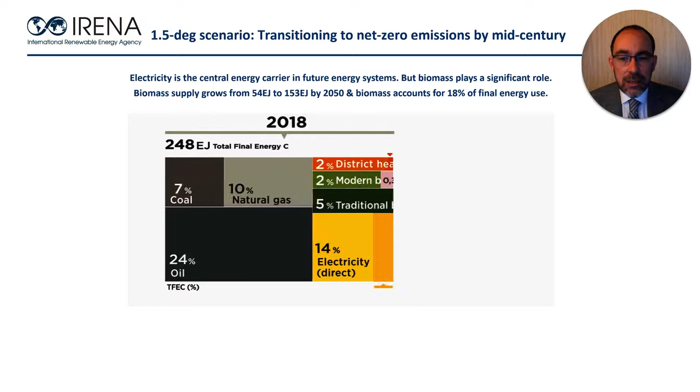The chart you're seeing now shows how the use of key energy carriers evolves over time in IRENA's 1.5 degree scenario. Renewable energy supply, electrification, and energy efficiency are the key components of that transition. Our analysis suggests that we have most of the technologies needed for that transition, and crucially, that energy transition is affordable.

As I said earlier, the pace and scale, however, is daunting. To give you a sense of that, by 2050, power generation triples compared to today's level, and renewable supply reaches 90% of total electricity, up from 25% in 2018. That's going to require 10 times more renewable power generation capacity.

By 2050, around 58% of final energy consumption is electrified, either directly or through green hydrogen and its derivatives. Hydrogen demand grows from 120 megatons to 613 megatons in 2050. That requires something like 160 gigawatts of electrolyzers to be added every year from now to 2050. Installed capacity of electrolyzers was just 0.3 gigawatts in 2020.

Biomass equally needs to substantially grow. In the 1.5 degree scenario, it grows sustainably from 54 exajoules to 153 exajoules in 2050, with biomass and its derivatives accounting for 18% of final energy use by 2050. Now, that 153 exajoules is at the high end of our and others' assessments of sustainable potential. One of the big challenges in the energy transition, therefore, will be scaling up production sustainably, i.e. without causing social, environmental, or economic harms.

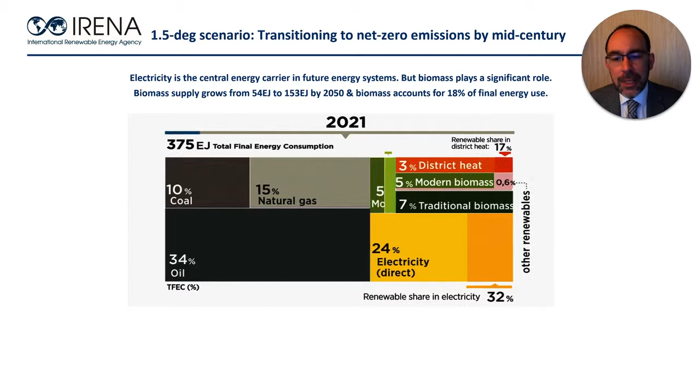Aviation is widely regarded as one of the trickiest sectors to decarbonise. Globally, aviation produced 915 million tonnes of CO2 in 2019, about 2% of total global emissions. And it was a sector expected to grow. Prior to COVID-induced reductions, annual jet fuel consumption was about 360 billion litres a year, and it was forecast to more than double by 2050.

As other sectors decarbonise fast, aviation will account for a growing share of remaining emissions. And beyond energy use, aviation is also responsible for non-CO2 related impacts on the climate.

The industry is committed to a 50% reduction in CO2 emissions by 2050. But in the context of those global net zero targets, a 50% reduction is not ambitious enough. IRENA's 1.5 degree scenario suggests aviation emissions will need to fall by about 90% by 2050.

Now, the optimum mix of solutions to decarbonise aviation is still not clear at this point in time. However, the key building blocks are pretty clear. As with most sectors, the starting point needs to be to manage demand, both in terms of demand for air travel and the energy demand of that travel, i.e. by improving efficiency of aircraft and of operations.

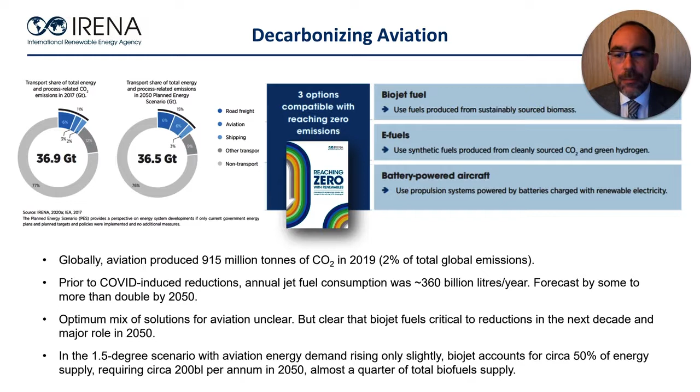So let's talk about Biojet. Biojet looks to be the only cost-effective option for partial emission reductions in aviation in the next decade, and it looks likely to play a major role in decarbonisation through to 2050.

Our 1.5 degree scenario assumes that energy demand can be held down so it only increases slightly by 2050. And within that scenario, Biojet fuels provide roughly 50% of final energy demand. Delivering that level of energy demand would require about 200 billion litres of Biojet fuels per annum in 2050.

Next month, as part of a series of deep dive reports on key components of the pathway to zero, we will be publishing the Reaching Zero with Renewables briefing paper on Biojet fuels. That explores in depth the current status and future potential of Biojet and the actions needed to realise that potential. Let me give you a few insights from that work, and then I think other presenters will dive a little deeper.

Current Biojet production is about 140 million litres per year. And although production has increased significantly, up from 7 million litres in the previous year, commercial volumes remain relatively small, less than 0.04% of current aviation fuel use.

Production is currently limited to 2 plants that routinely supply about 9 airports, and whilst demand is ticking upwards, Biojet use is still relatively low. It's typically blended in low ratios with fossil jet fuel, and cumulatively to date, an impressive sounding 315,000 flights have used blended Biojet fuels. But that's less than 1% of flights in 2019.

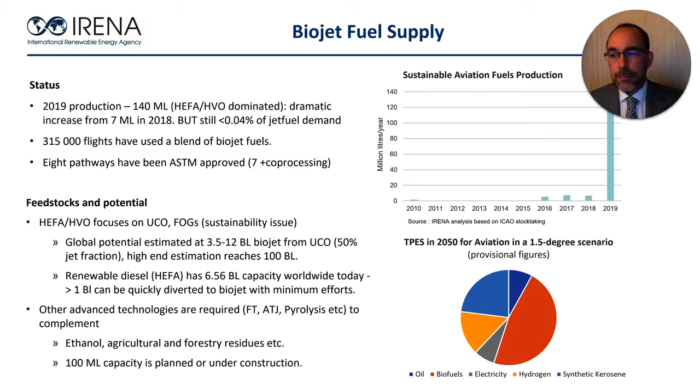Finally, a quick word about costs. Fuels produced by the HEFA HVO route cost around 3 to 6 times more than conventional jet fuel, and that's mainly due to higher feedstock costs. High capital costs will be an obstacle for some of the other technologies that I mentioned, such as gasification. Our report highlights various strategies focused on that, but the cost disparity will remain for many years to come and will require policy interventions, but is also a powerful driver for innovation.

So in conclusion, as with other parts of the energy system, global goals of deep decarbonisation by 2050 require concerted action this decade. Aviation is one of the sectors where least progress has been made. Biojet has a crucial role to play in addressing that and has significant potential. But we need systemic innovation, including technology innovation in feedstocks and conversion technologies, but going beyond that, where technology innovation goes hand in hand with innovation in supply chains, business models, and the financial and policy incentives. Together, that systemic innovation can greatly increase the future prospects of biojet fuels.

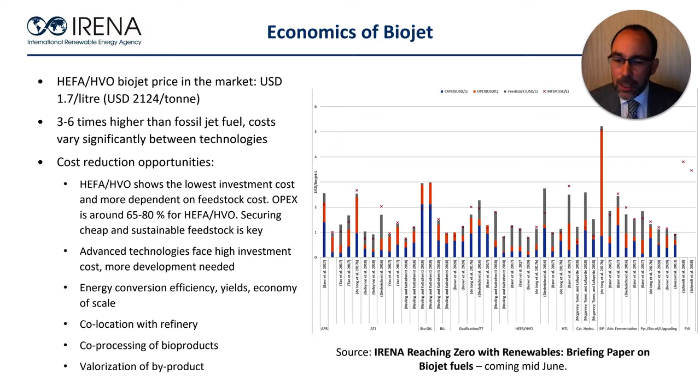Department of Biotechnology, known as DBT, has been promoting innovations and research, development and demonstration through multiple schemes at both national and international level. It is my pleasure to present India's perspective on sustainable aviation fuel for the side event of the 6th Mission Innovation Ministerial. Thanks to Mission Innovation Secretariat and the Chilean host for giving this opportunity.

India has been engaged actively in MI activities and was co-leading sustainable biofuel innovation challenges along with countries Brazil, Canada, and China. A few collaborative projects supported by India in advanced biofuel areas, including jet fuel R&D. Building on success of R&D base during phase 1, co-leads have agreed to work together in focused areas of sustainable aviation fuel.

Liquid biofuels is one of the prime candidates for decarbonization of hard-to-abate transport sector, and thus can result in substantial reduction in GHG emissions. The National Policy on Biofuels 2018 encourages blending of biofuels in conventional fossil fuels. Aviation fuel consumption in India accounts for about 8% of Asia's aviation fuel demand, with average annual growth in the range of 7 to 9%. Current production of aviation fuel is 180,000 barrels per day, though the COVID pandemic has adversely affected consumption of aviation fuel.

Meeting ASTM specification is extremely important for SAF. Once certified, SAF can be used for blending purposes in aircraft using an airport delivery network.

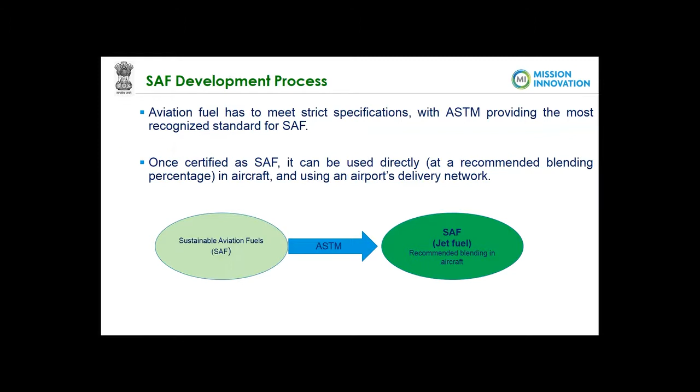Aviation presently contributes 3% of global GHG emissions. A significant increase in the production and consumption of sustainable aviation fuel is required in order to achieve the GHG emission reduction targets proposed by ICAO.

Presently, less than 0.1% of jet fuel is from bio-origin, and 99% of this is hydroprocessed esters and fatty acids. Feedstock plays a very important role. GHG reduction potential differs depending on the raw material used with respect to conventional jet fuel.

Concerted effort is required along the value chain, hence it is important that all sectors and concerned ministries work together. DBT, Ministry of Science and Technology, promotes innovation and RD&D by funding projects, while Ministry of Petroleum and Natural Gas regularly works on policy and implementation aspects. CSIR labs, DBT bioenergy centers, NGOs, institutions like IITs, and universities all implement R&D projects.

Oil marketing companies produce large SAF quantities from a viable refinery-based technology. The Ministry of Civil Aviation is interested in meeting the forthcoming ICAO regulations for low GHG emissions from the aviation sector.

Sustainable supply of feedstock is the most important part for commercialization of SAF. Currently, used cooking oil is used. About 10% of edible oil is available in India, of volume around 2 million tons per annum.

Tree-borne oils have certain challenges on the supply side with respect to yields, harvesting, etc. Hence, the potential feedstock would be short rotation non-edible oilseed crops of the mustard family, for example Niger, Carinata, camelina, etc.

For sustainability, it is always important that multiple feedstocks are explored for SAF and innovative, cost-effective pathways are developed. A few examples of low carbon pathways are alcohol-to-jet technology coming from cellulosic sugars, catalytic hydrothermal liquefaction, microbial conversion of alcohol to isobutene again from sugars, syngas from biomass as well as municipal solid waste through gasification, then lignin depolymerization, direct reduction of CO2 that is power-to-liquid, and microbial lipid production.

Life cycle analysis of these pathways is very important. As mentioned earlier, GHG reduction potential of SAF vis-a-vis petrofuel depends on feedstock type as well as technology pathways.

In power-to-liquid pathways, there are huge opportunities in India for production of clean liquid fuel using renewable power, hydrogen and carbon dioxide. Various R&D segments are electrolyzer design, catalyst development, carbon dioxide capture, reduction, etc.

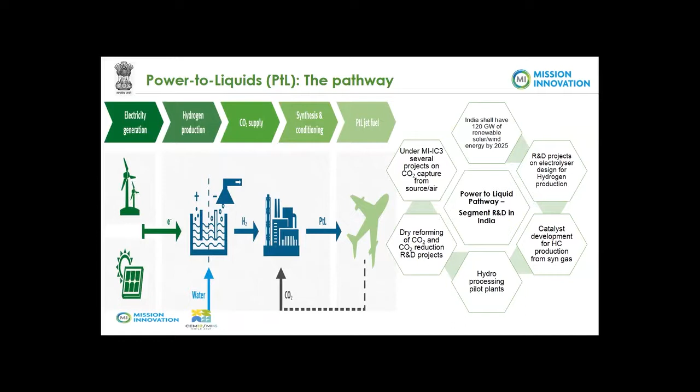In conclusion, I would reiterate that scalability and delivered cost are the primary challenges for SAF. Net energy ratio, LCA studies, and techno-economic analysis are very important at an early stage. Collaborative efforts are key to speed up technology development, and deep engagement of stakeholders supported by conducive policies and R&D efforts will make a difference. Mission Innovation is a uniquely placed opportunity to undertake this challenge.

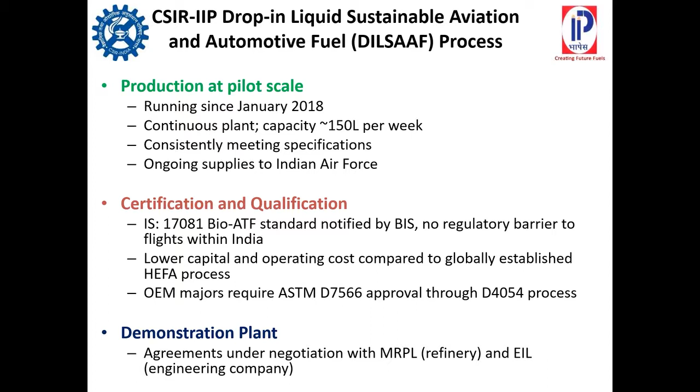We are currently in discussions with a refinery major as well as an engineering major to build a demonstration plant of about 15 tons per day. This is also required for the qualification of the fuel through the ASTM D4054 process.

We plan to use feedstocks which are available abundantly today, like used cooking oil and palm stearin, but also tree-borne oils and rotation crops, and futuristic feedstocks that we believe can be brought to scale in India through the supply chain aspects of the research.

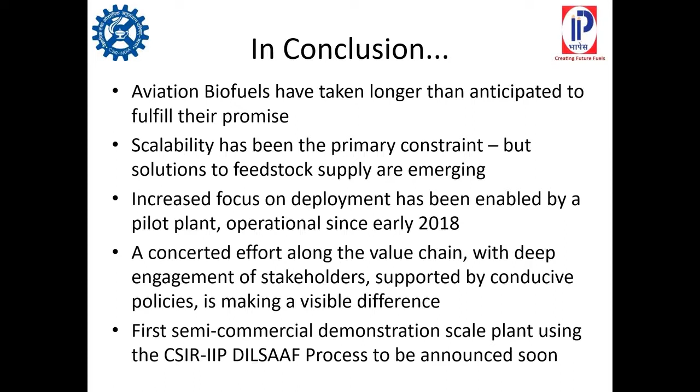Aviation biofuels have taken longer than we hoped to reach where we have reached, but we think we will get there soon enough, propelled by international activities like CORSIA and with concerted efforts along the value chain, with deep engagements of stakeholders and policymakers and passionate researchers like we have on our campus. We hope that our future will be sustainable and that we will be able to give back more to nature than we have taken from it all these days. Thank you.

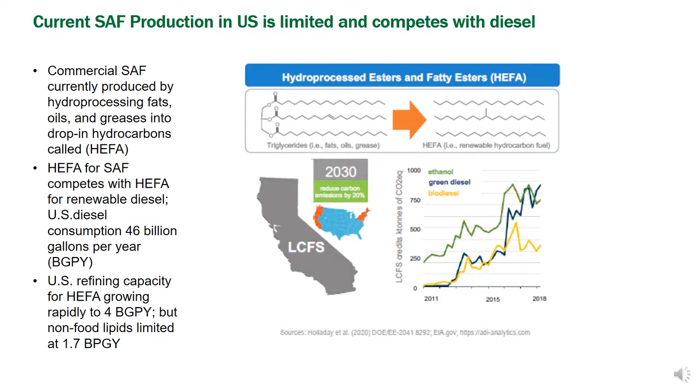Current SAF production in the United States is limited, and it does compete with renewable diesel. SAF is currently produced by hydroprocessing fats, oils, and greases into drop-in hydrocarbons, also known as the HEFA process. HEFA for SAF competes with HEFA for renewable diesel, which has a larger market in the United States. HEFA refining capacity in the U.S. is growing, but those processes that rely on waste fats, oils, and greases will be constrained by supply chain limitations of waste FOG.

The U.S. airline industry has made significant commitments to net zero carbon emissions by 2050. As part of that commitment, they've pledged to work with governments and other stakeholders to rapidly expand production and deployment of SAF in the U.S., with a goal of making 2 billion gallons of SAF available by 2030.

There's also proposed legislation in the United States to incentivize the production of SAF. Currently, under negotiation are blenders tax credits, investment tax credits, and other grant programs.

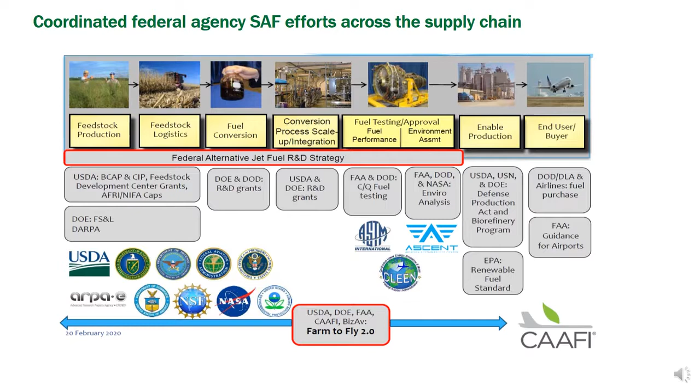BETO has conducted several workshops that focused on understanding the technologies available for scalable production, their economic competitiveness, their environmental benefits, and the supply chains for feedstocks that would enable biofuel jet deployment. These workshops have informed our current investments in SAF.

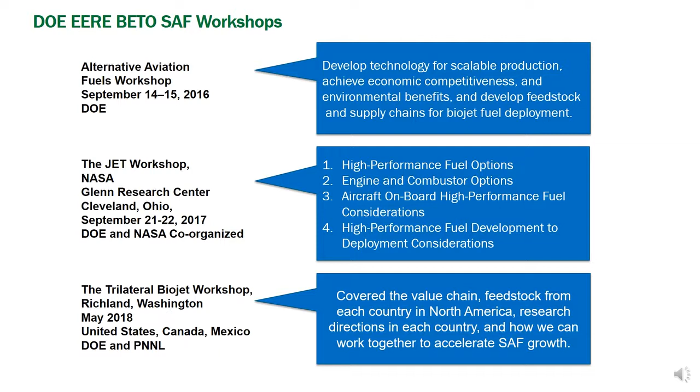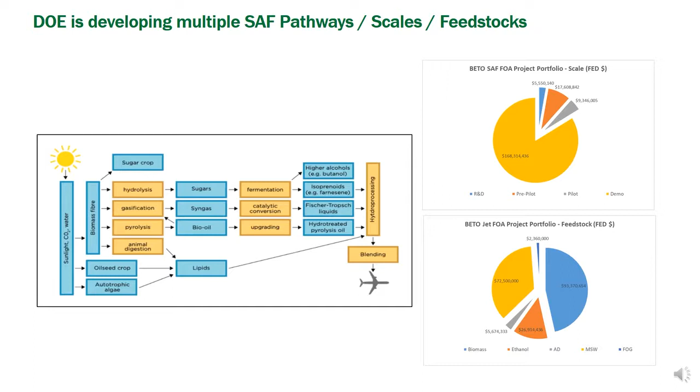In fiscal year 21, BETO announced a funding opportunity announcement for $31 million to focus on the development and demonstration of low-carbon biofuels for aviation, marine, and heavy-duty markets. Those technologies must deliver a 70% greenhouse gas emissions reduction, and they're available for technologies at various scales, from pre-pilot unit operations through demonstration scale facilities.

Thank you for your attention. I look forward to joining India as co-leads for IC4, the Innovations for Sustainable Aviation Fuel. We look forward to working with other member countries and stakeholders on growing the sustainable aviation fuel supply and markets. Thank you so much for your attention.

I'd like to first thank the organizers for the opportunity to say a few words about sustainable aviation fuels in Brazil. We can start by asking a question: what is the global production of biofuels today? The number is between 3 and 5%. When you look at the biofuels share of the internal demand of fuels for transportation in Brazil, one reaches 23% on an energy basis, which corresponds to about 30% on volume. How did we get to this? It took us nearly 5 decades, as shown in the graph on the right.

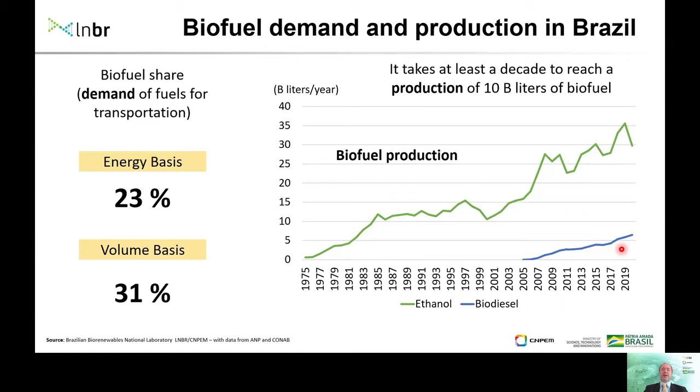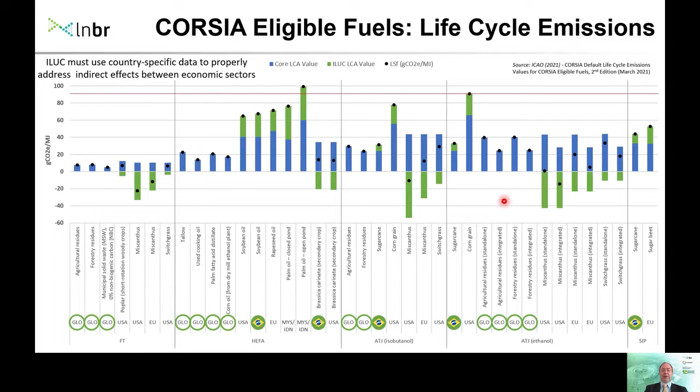Should call your attention that they don't have green bars because they mostly depend on residues. And we have a large project in the nation trying to address that. This is a consortia called BioValue that involves 11 universities and research centers, and also partners from industry, aviation, oil and gas, and pulp and paper sectors. This is a Horizon 2020 project that has a sister project in Europe called BECOOL, and among other things is trying to integrate biochemical and thermochemical routes as well in the typical biomass to liquid strategies.

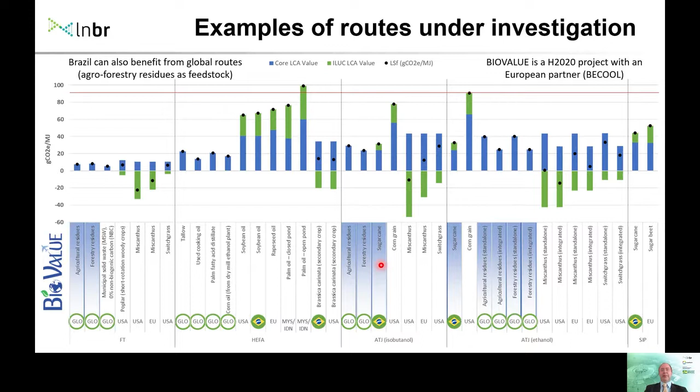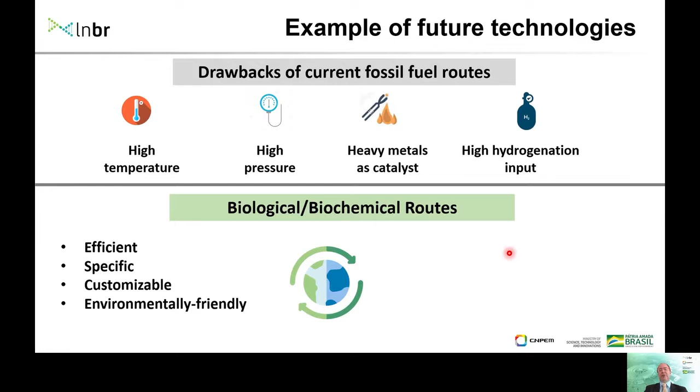An outlook for the future: we think we should not discard technologies. On the contrary, we should explore as many as possible. We know the drawbacks from fossil fuel routes, which are high temperatures and pressures, heavy metals, and high hydrogenation inputs. We think that biological, biochemical routes have the opportunity to be more efficient, specific, customizable, and obviously environmentally friendly. This is a potential area for international collaboration as well.

In summary, I believe it will take at least a decade of continuous R&D and country-specific policies so that we can have biojet fuel at a reasonable production scale in Brazil. That R&D should be accompanied with scaling up capabilities, and we should not discard, but rather consider different types of technologies and routes. Finally, continuous financial support is necessary so that we can foster partnerships between industry and research centers, and obviously international collaboration.

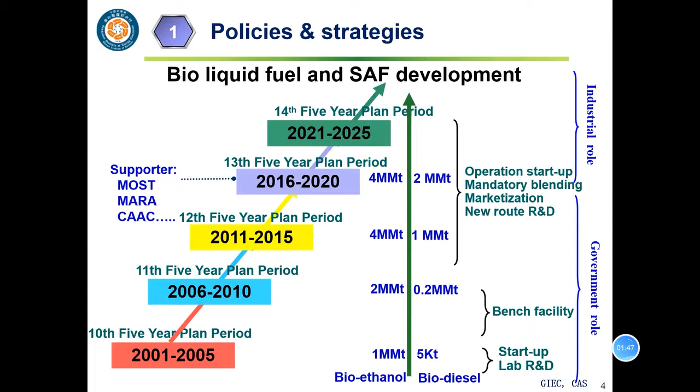According to CAAC's policies, by 2035, the concept of green development will be deeply rooted in the whole industry. The Green Development Policy System, Standard System, and Assessment System will be mature and complete. The green management level will be greatly improved. To achieve these green aviation goals...

China will further implement the carbon emission trading mechanism, introduce more active social support policies, encourage aircraft to use more alternative fuels and additives, and promote SAF airworthiness certification.

Current technology allows SAF to be produced from a wide range of feedstock, including crops, straw, forest residues, agricultural residues, and urban household waste. Other sources, such as algae, could also be used for SAF production. Besides, using the waste gases produced as a byproduct in steel manufacturing to produce SAF is showing great potential. Overall, there is at least 1.5 billion tons of feedstock available for SAF production in China.

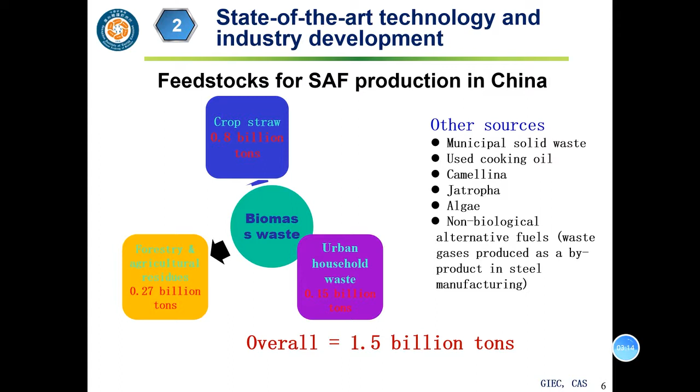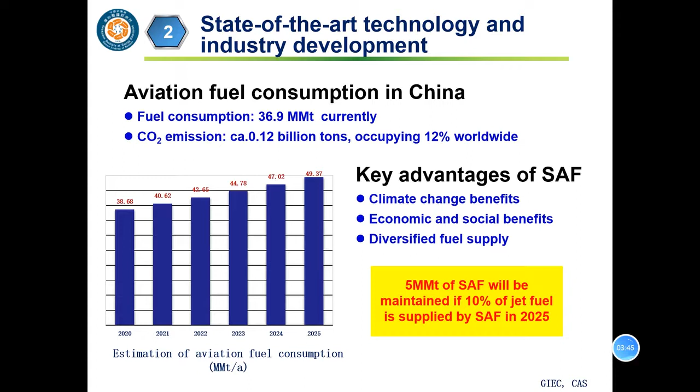Currently, the annual aviation fuel consumption in China is about 36.9 million tons per year by airlines. As to SAF, the expected demand will be 5 million tons per year if 10% of jet fuel is supplied by SAF in 2025. Therefore, the development of SAF will bring great advantages to sustainable development goals for various aspects.

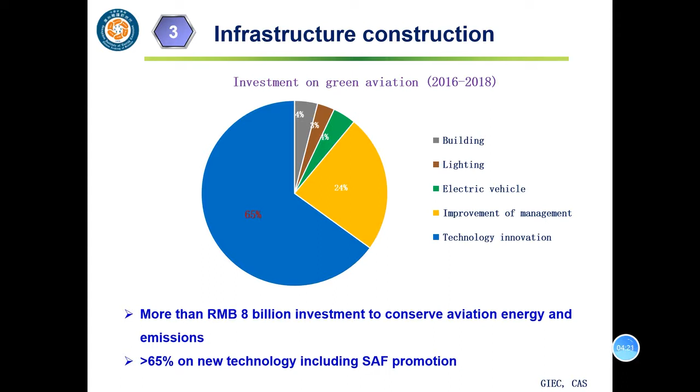Over the past 5 years, remarkable achievements were made in the construction of aviation infrastructures. Let me take the total investment from 2016 to 2018 as an example. More than 8 billion yuan of investment is used to conserve aviation energy and reduce carbon emission. 65% of the investment is in the field of technology innovation, including the promotion of SAF R&D.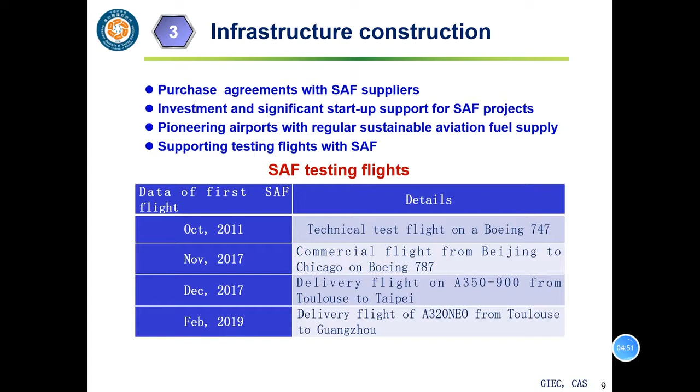In addition, the large-scale SAF pilot construction has been highly concerned and supported by several national departments in China, including MOST, MOA, and others. The R&D of APC technology from lignocellulose biomass, led by our institute, has achieved great success.

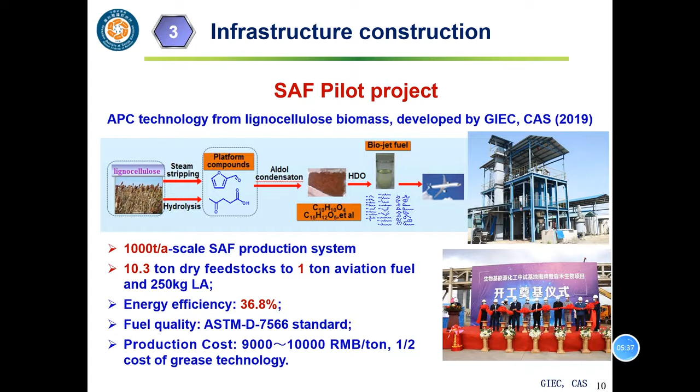1,000 ton per year demonstration projects are under construction. The system energy efficiency can reach 36.8%, and the fuel quality meets the ASTM D7566 standard. The production cost is about 9,000 to 10,000 yuan per ton, which is half the cost of grease technology.

As a conclusion, to tackle climate change and the international regulation of aviation emission, we will enforce the following aspects in the next step: 1. Improve middle and long action plans for SAF development. 2. Take primary responsibility by airports and airlines. 3. Attract private investment and improve the policy system. 4. Intensify the integrated industry chain. 5. Enhance international communication and cooperation. That's all, thanks.

Thank you for this opportunity to present the Danish roadmap to sustainable fuels. My name is Lasse Rosendahl. I'm the head of the Department of Energy Technology at Aalborg University in Denmark.

The Danish greenhouse gas reduction targets follow 3 levels: in 2025, 50 to 54% reduction; in 2030, 70% reduction; and by 2050, full carbon neutrality is envisaged in our emission profile.

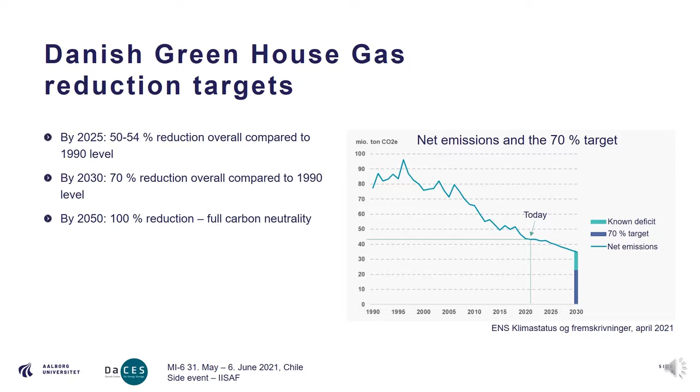You can see in the graph to the right that as we go towards 2030, the 70% target lies a bit beyond what we can bring about by known technologies already today. So there is obviously a research challenge for us to reach the 70% target in only 9 years.

The way the Danish government has gone about this is to set up 4 green missions: one on carbon capture, storage and use; one on green fuels; one on sustainable agriculture; and one on recycling and reduction of plastic waste.

In the Danish Center for Energy Storage, we've coordinated a draft roadmap for the green fuel mission based on inputs from more than 100 stakeholders.

The essence of this roadmap is, as a roadmap focusing on the entire transport sector, it's quite diverse, so it has a number of energy sources, intermediate energy carriers and technologies before we get to a wide range of final products. It's across all transport modes. It's both biofuels and power-to-X and combinations. It's carbonaceous and non-carbonaceous fuels, so it is very much a diverse pathway leading towards a range of sustainable transport fuels in the future.

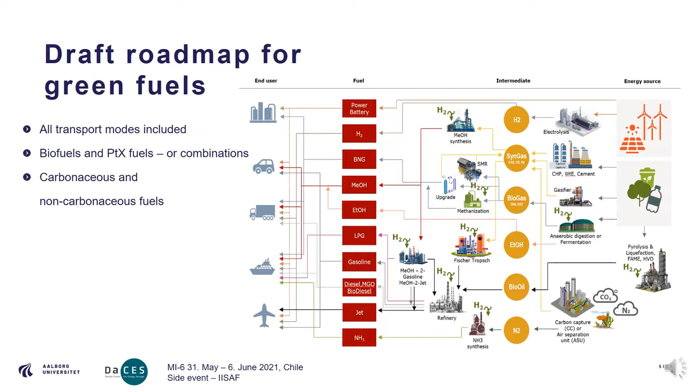If we focus on jet fuel, it's a little less crowded. On the graph to the left, you can see the expected consumption by fuel type in 2020, 2030, 2050. And as we look towards 2050, we can see that the consumption is very much dominated by kerosene, by jet fuel. There is a small amount of hydrogen now also in the mix, and also a small amount of electrically powered aviation.

So that obviously means that the roadmap is dominated by different types of conversion technologies, where we work with a number of different biomasses and organic waste inputs, convert them in a number of stages, mostly towards jet fuel. And all of this is then combined with green hydrogen.

Back to this comment, we have not only pure biofuels, but also the combination of green carbon from biomass and green hydrogen from a power-to-X implementation.

In Denmark, we are predominantly looking at gasification to form a syngas, followed by either Fischer-Tropsch or other types of synthesis; biogas, where subsequently we create a syngas and then go through methanol to create jet fuel; and then bio-oils, either pyrolysis or hydrothermal liquefaction, that are then refined to produce kerosene. So we have these different types of technologies in scope.

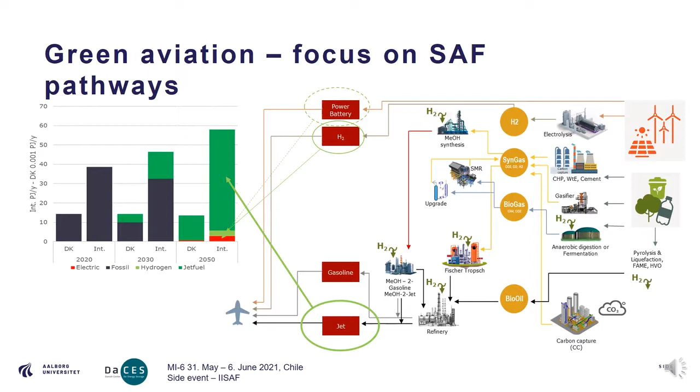To give an example of where Denmark stands in terms of research, I've selected very recent jet fuel results from hydrothermal liquefaction that we've achieved in a European project, the Horizon 2020 project - HyFlexFuel based on sewage sludge. You can see the distillation curves to the left.

If you then take the jet fuel, the distilled jet fuel cut, and carry out a much more detailed analysis in terms of aviation fuel properties, this has been done by DLR within the JetScreen project and also University of Dayton Heat Lab. You can see how this potential SAF performs compared to a conventional jet fuel.

You can see in the distillation curve to the right, the green area is conventional jet fuel. The black line with the dots is the HTL jet fuel, and you see that it's very close and definitely within specification limits. Moving just a tad to the left, you see the small bar plots - the black dot, which is the HTL fuel, lies very well within specification limits, and in most cases actually within normal jet fuel range.

The final one you can see is the distribution of carbon numbers, very much similar to a regular jet fuel. You can also see that in terms of the average carbon number, this jet fuel is 11.3, whereas on average fossil kerosene is 11.4. So very, very close, and it very much indicates that there is definitely a whole range of bio-derived jet fuels that can be brought into play in the future.

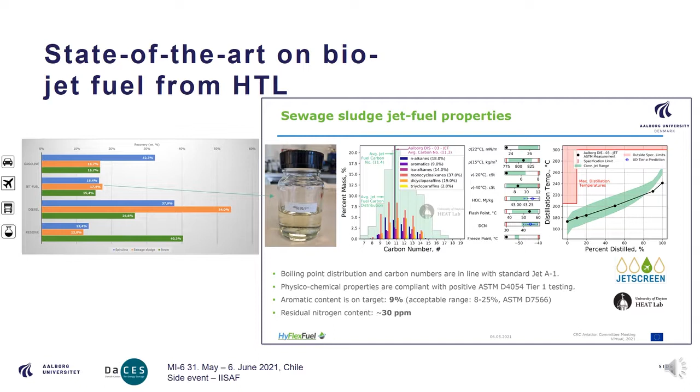So to sum up, in terms of the Danish ambitions, based on the roadmaps that were produced here in the spring, delivered on May 12th, there will be a call to distribute 100 million euros onto these 4 green missions. This call will open in August, and there'll be a decision in December as to which activities we'll go forward with. As I said earlier on, there'll be a focus on near-term implementation and longer-term research targets.

In terms of Danish strongholds, it's distributed across different technologies, either liquefaction technologies to produce an oil and then refined to a jet fuel. An example of an ongoing project is what's called the Low Carb Fuels Project that focuses on this. We have gasification and Fischer-Tropsch as a pathway, and then based on the very large biogas stronghold in Denmark, via methanol and CO2 to produce a jet fuel. So this is the range of technologies that we'll be focusing on.

One further thing in terms of Danish competences is sector coupling, understanding how to link these green fuel technologies with, for example, the carbon capture activities, but also sustainable agriculture, and to exploit the links across different energy vectors, so to really make an efficient integration.

Aviation fuels in the Netherlands are important because the Netherlands is looking for a major greenhouse gas reduction. In the year 2050, we aim to achieve 0 greenhouse gas emissions, and 4 years ago a climate agreement was formulated to realize 49% reduction already by 2030. Because of the Green Deal in Europe, this will go up to 55% very soon.

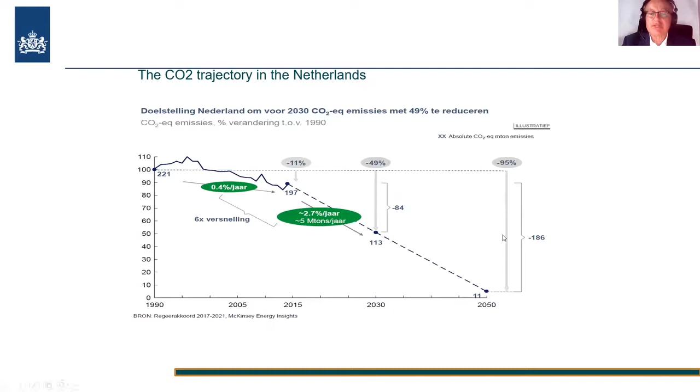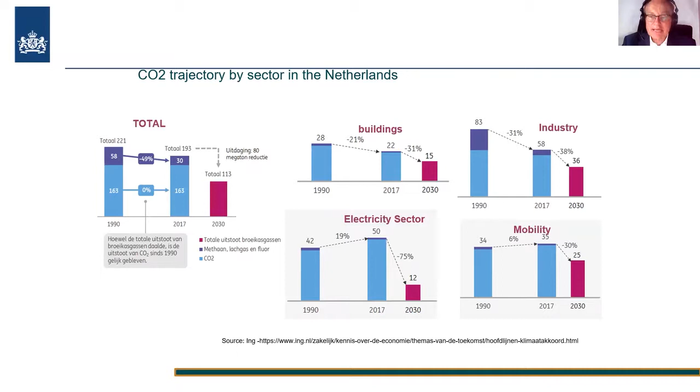So all sectors in the Netherlands have to contribute to this. The total emission from the Netherlands has to be reduced, so it's about buildings, electricity, the industry sector, and also mobility. For all these sectors, we have developed plans and they are being implemented right now.

If you look here, you can see that in the mobility sector we have introduced biofuels, and at this moment we have an increased amount. It has gone up to about 5%, and it's now even higher in percentage of biofuels in the Netherlands. We mainly use ethanol to replace petrol. We also use some biogas, and a little bit of HVO, but it's mainly FAME that is used to produce the diesel. So all these different biofuels play a role.

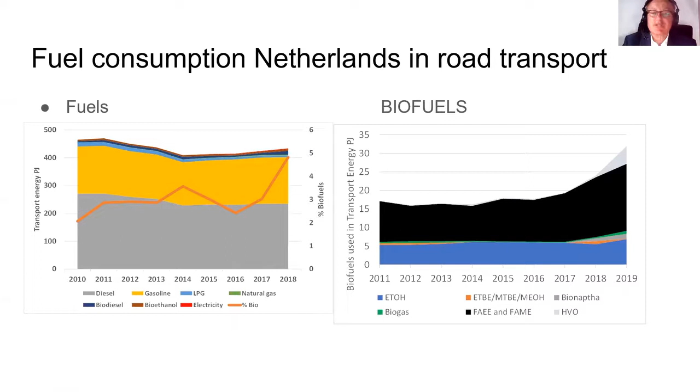But of course we are now also asking ourselves: this is in road transport, but what can we do in aviation? For aviation, we have formulated an action program on aviation fuels, and in this program we have set a goal for 2030 of 14% sustainable aviation fuels. We think that until 2030 we will mainly work with HEFA, but we will also develop new advanced biofuels and advanced aviation fuels that can be used and approved by ASTM. So all these new fuels will play a role.

Recently we organized a European high-level conference on sustainable aviation fuels, where you can hear our minister and other ministers talk about this ambition and what needs to be done. In Europe we are very serious about this 14% greenhouse gas reduction target in the aviation sector, going up to at least 50% by 2050.

But we need innovation to make this happen. Up till now in the Netherlands we have had a system called the transport support. But this year, in 2021, we will have two new calls, and there is one specific call for aviation and marine biofuels.

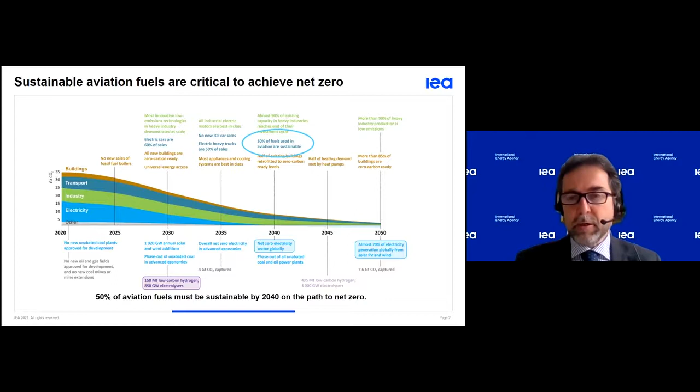So sustainable aviation fuels is one of such important technology pathways, and according to our analysis, half of the fuels used in aviation must come from sustainable sources by 2040. This is a huge increase from the 0.1% of today.

Now, over time, biofuels actually shift to aviation. They have to grow, they have to triple in transport, going up to 11% of total transport energy demand by 2030, and then further to 14% by 2050, even as electric vehicles and hydrogen expand.

Today, nearly all liquid biofuels are used in road transport, and we expect that to continue to expand to 2030. However, in the longer term, as other alternatives such as electric and hydrogen vehicles displace some combustion vehicles, liquid biofuels shift to aviation, which has fewer alternatives, reaching 55% of the total by 2050.

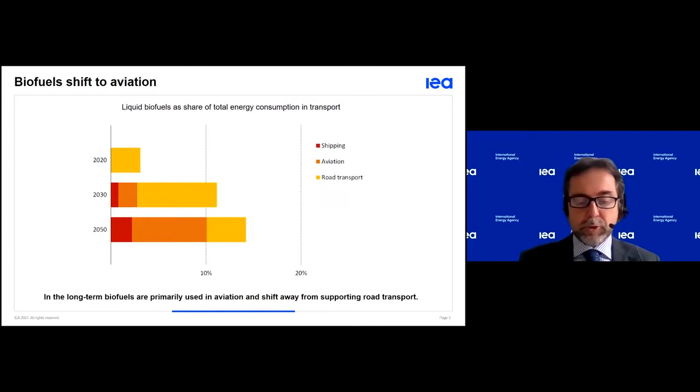For sustainable aviation fuels to play this role in net zero, they must start production at scale in this decade and then continue to expand to 2050.

Now, if you compare the different uses in transport, indeed, sustainable aviation fuels have the smallest share of mature technologies. Most of the technologies are in the prototype or demonstration phase, and this includes many sustainable aviation fuel technology pathways. Some biofuels in the form of Biojet are just entering the market uptake phase today, but many other technologies need to be demonstrated and then scaled, and this is the obvious important topic of the proposed innovation challenge.

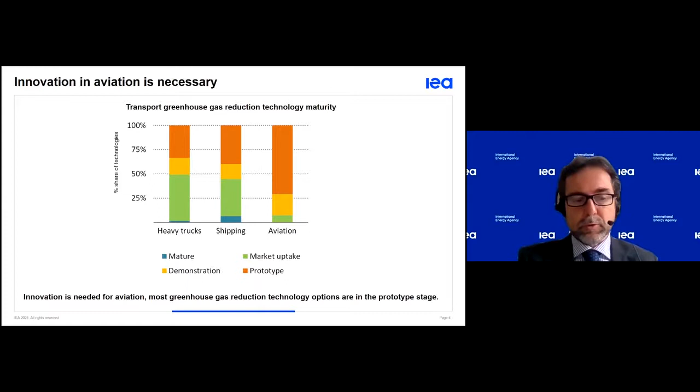Now, looking more carefully at advanced biofuels, this is one important path with which the world can expand bioenergy at scale while minimizing the impacts on the environment. Today, most liquid biofuels come from conventional ethanol and biodiesel, with a large share produced from crops like corn, sugar, wheat, and soybeans. Over the coming decade, advanced biofuels that have both low carbon intensity and don't compete with food or forest land use grow considerably.

Succeeding in this challenge means taking bold but affordable steps. In 2030, 15% of aviation fuel comes from sustainable sources, almost all from Biojet. In 2050, 75% of total fuel consumption comes from sustainable fuels, 45% from Biojet, and an additional 30% from hydrogen.